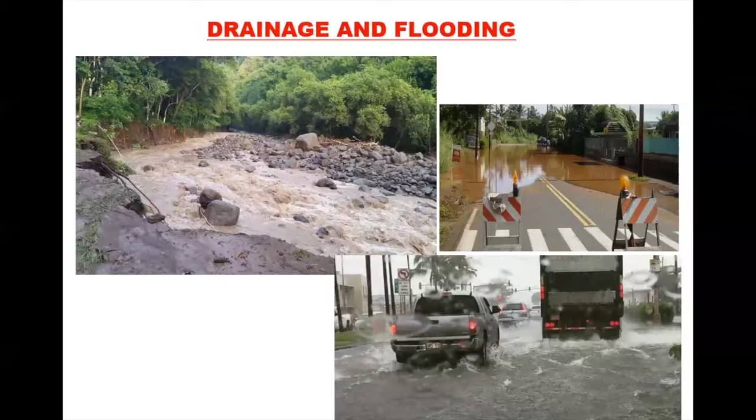And because of the way things are situated, a lot of that urbanized area where you work, where you play, where you live, is usually in the lower areas where all the water is going to come down to. So you're going to see a lot of this happening. And as urbanization keeps increasing, you're going to see more and more of these kinds of drainage and flooding situations around the island. Other things that you guys are probably aware of is like sea level rise effects.

What you're trying to see is, of course, during this summer, we saw the king tides that were happening.

So now water is actually coming up further into areas where we normally never used to see water. And you're also going to see things like erosion occurring right along the beach and coastal areas. So that's another issue we have to address.

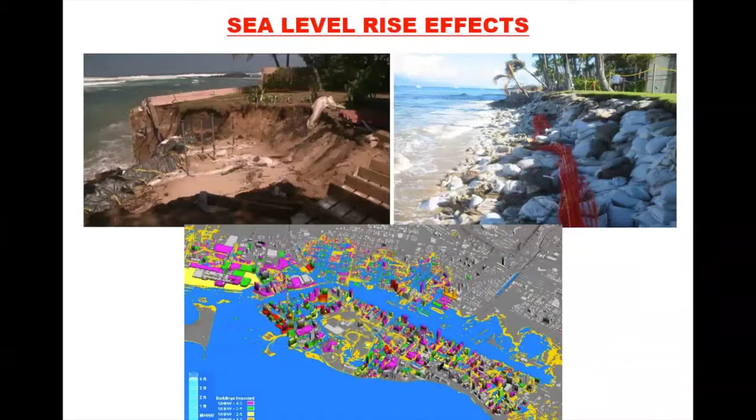Of course, other things is because we're on an island, we're surrounded by water. So we rely on this precious resource either for recreation, or in this kind of situation, in order to sustain us as far as drinking water.

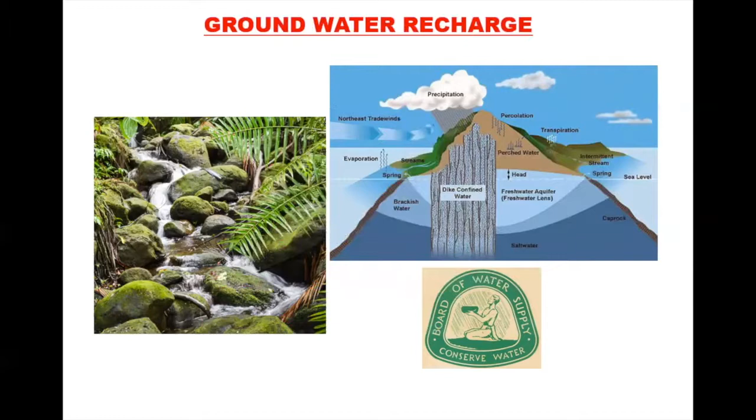So what does all this have to do with what we do? Well, where we come in is obviously from the city and county of Honolulu. A lot of it has to deal with all those issues. And then the other thing that ties into this is water pollution.

So this is something you could say maybe typical, but maybe not as typical, depending on what's happening in that neighborhood. When it rains, you're going to see all this pollution occurring, where the water starts turning murky, very turbid, and it washes off things like pathogens, oils and greases, metals, nitrogen, and phosphorus, which affects both the aquatic habitat, the plants that live in it, as well as the people who use it for recreational purposes. Okay, so what does that have to do with the city?

Well, the city itself, the way we explain it, is that we're responsible for anything that's owned and operated by the city. So that includes a lot of the assets, what we might call a drainage system—the roads, the storm drains, the streams, ditches, catch basins, anything that would capture and collect the water and get it out into the ocean.

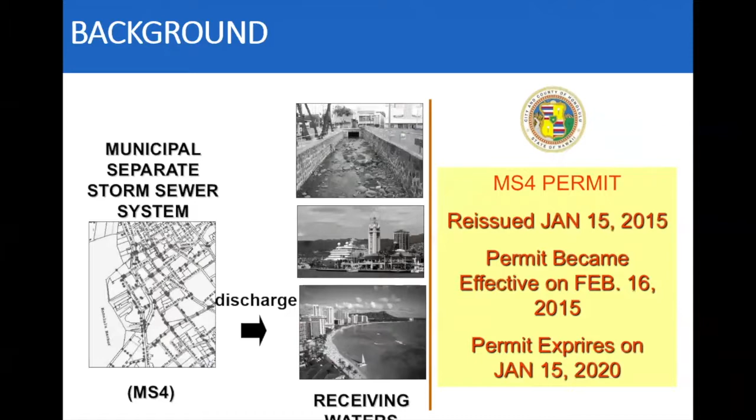But what it does say is that the city needs to implement a program to try to minimize, mitigate, and remove whatever pollution to the best of its ability, to somehow meet the state's criteria in terms of what they feel is considered clean, or pristine.

So that's what it kind of looks like—we get this permit and it breaks down into these seven various elements. Starting from the top, on the left-hand top corner here, and on this side, we'll work it around in a counterclockwise way.

It starts with public participation and outreach. We're working with the public, volunteers, various agencies, as well as the public themselves and businesses, trying to educate them on what's going on.

Then we move into construction site runoff control. That's really when things start to go into development, urbanizing your neighborhoods—building a house, a shopping center, a high-rise, whatever it might be. During that phase of construction, the city needs to establish a program for how they're going to mitigate and minimize the runoff coming from these construction sites.

Then it moves into the next phase, when there's an actual discharge. Say a contractor is trenching in for utilities, or putting in the foundation for houses—by doing that, they're disturbing the earth, moving up the soil, exposing it to the elements. So when it rains, it's going to wash all that out. Contractors themselves have to follow certain requirements to try to prevent that from happening.

But if it does happen, that's where our illicit discharge detection and elimination system is intended to go out and give the city the authority to enforce on a contractor or business, telling them they cannot do this. Because of what you've done, you're going to have to do corrective actions, clean it up, and at the same time may have to pay a fine.

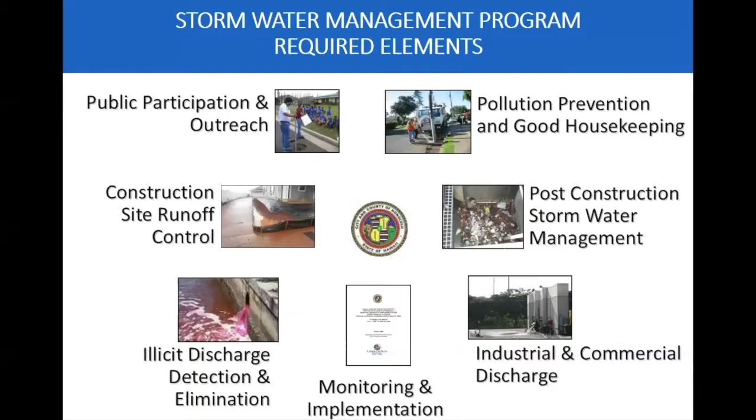So when we talk about treating the water, this is just a real quick overview. When it rains, the rainwater flows onto surfaces, whether paved, concrete, or a roof building. It hits that, and because it's impervious, it just washes it off. So what we like to do is filter that water, either allowing it to infiltrate or capturing it to reuse.

You could use it for other purposes, whether for landscaping, flushing toilets, or decorative ponds—anything you could think of for what that water could be used for. That's really the goal of our program: looking at ways to treat and reuse that water, and filter it so we can prevent it from being discharged into the ocean.

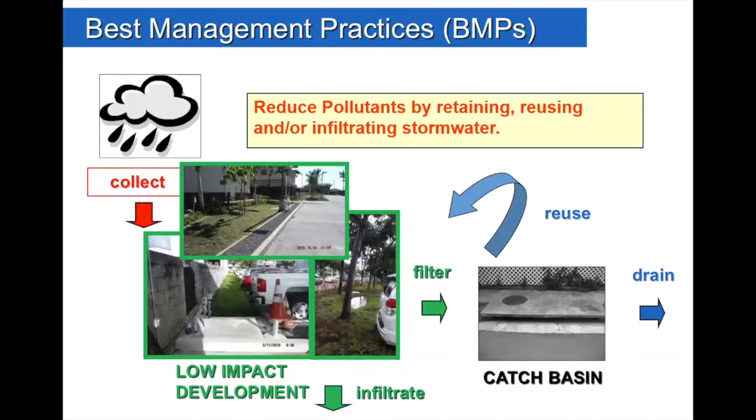So how do you do some of that? Some examples are infiltration basins, bioretention, green roofs, permeable pavement, cisterns, and vegetative swales. That's not the only things you can do, but there's a whole suite of options, and a lot of technology and studies being done on their effectiveness. From a city standpoint, we're still continuously learning about how these different systems can benefit the public, businesses, and the design community who come up with these plans.

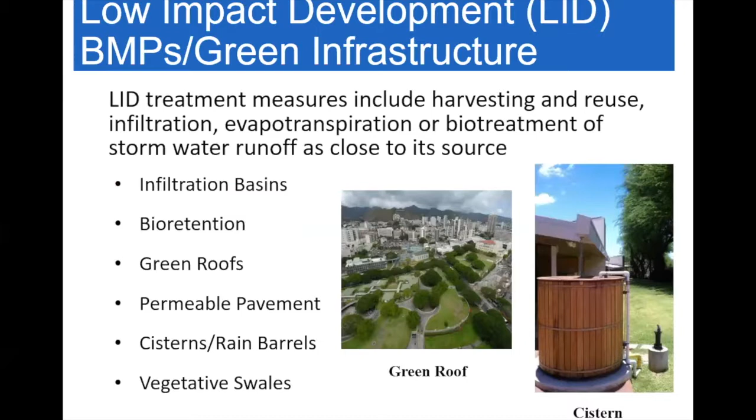Really what we'd like to do is provide resources, information, and research on how that could be applied to project sites or development plans. Then it becomes part of the overall project rather than something added in at the end just to get a permit. That's the change in mindset we're trying to get out to the public.

These are what we'd refer to as typical pollution sources—sediment, trash, debris, things you'd probably see visually. But there's a whole suite of different pollutants associated with that runoff, like bacteria or pathogens, nitrogen or phosphorus, or metals like copper, lead, and zinc.

That's what you see in a lot of urbanized areas—you might have a lot of vehicles, pet waste, wastewater systems, or anything contributing. But a lot of that you wouldn't actually see in the water; it's not a real visual thing. It's in the water itself, but you'd only know or detect it if you tested and measured it to see the results.

What you'd commonly find is that because of these things, you'll see some end results—fish kills, possibly algae blooms, or other effects like odor coming from the water, or you might get ill from contact with that water. These are downstream consequences you wouldn't obviously see in the water directly.

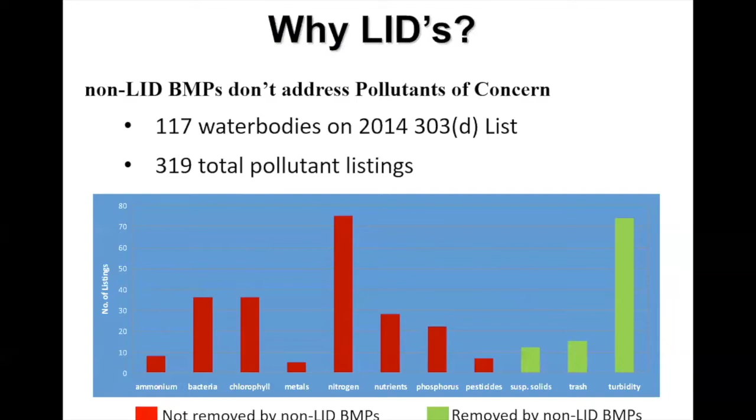As a city, we're not the ones actually coming up with this design - a lot of it is development. Developers come in proposing subdivisions, or plans to build a new commercial development center or whatever it might be. They come in with their plans proposing to follow whatever design standards the city has.

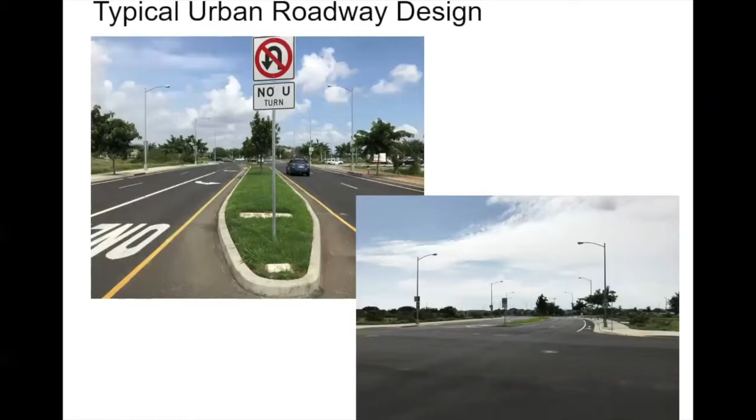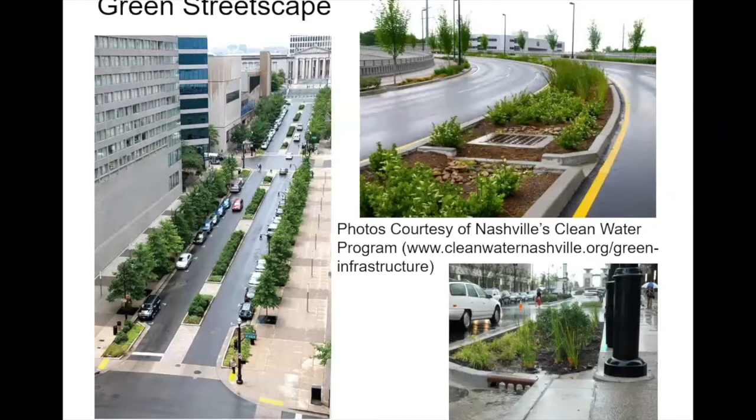This is something we like to establish, but we'd need ongoing discussions with the development community as well as the engineering community about how to make that change. That's pretty tough given everything that currently exists as the standard, and it would take a substantial effort to make that change. But that's something we're looking toward as a city agency - to provide that kind of resource to help the design community implement some of this.

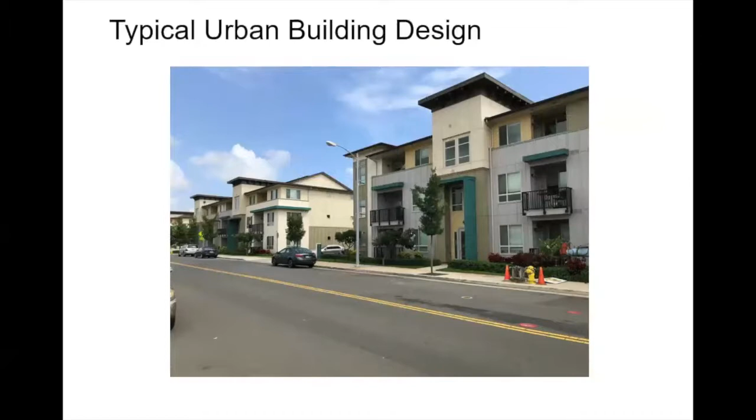So in most cases, they're not really capturing and treating that water, but rather just trying to capture it as quickly as possible and push it off the site. So what we like to do, from a more urban design perspective, is try to incorporate more of that green ideas or concepts into the building itself.

It's not just about adding landscaping primarily for an aesthetic purpose, but rather using it as a resource and capturing the water so that you could actually benefit something like helping with that urban heat effect, or maybe for water quality purposes, where you're trying to filter the water.

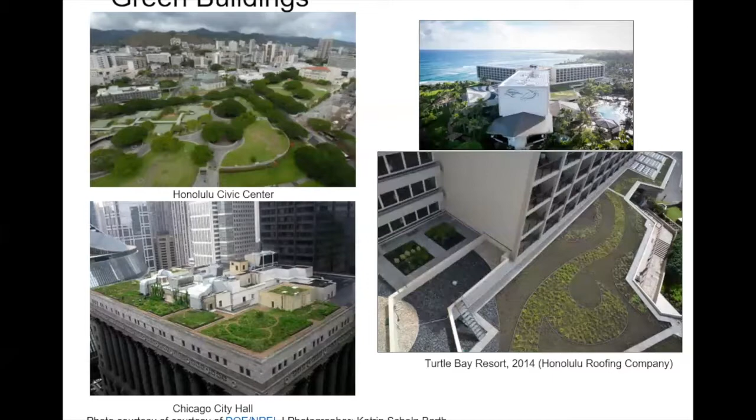Okay, so what is it going to take? I guess you can say it's probably a paradigm shift, both from the development community as well as from the engineering side. It's really thinking that there's going to be changes going on.

This is something that, I think more commonly, and maybe I was kind of guilty of this too when I was working in the private sector, is putting your head down and not wanting to worry about it. Just saying it will happen sometime in the future, I don't want to worry about this because it's just going to affect my schedules, my budget, whatever designs I'm going to have to do.

So obviously, what we like to do is have that ongoing discussion of how we're going to make that paradigm shift, to think about, rather than trying to get the water off the site as quickly as possible, capturing it and using it for other purposes. You're treating it more as a resource, looking at it as a benefit rather than as a hindrance to your design.

So what are some of those keys to success? Of course, like I mentioned, there has to be ongoing collaboration and teamwork, a discussion between the government, the planning community, the design community, you folks as researchers, and the up and coming minds of how we could implement some of these things. That's where we want to see what we can do to help long-term sustainability, from a water quality standpoint, a cost standpoint, an O&M process, things like that. That's something that has to be implemented at some point, but it's going to require everybody coming to the table and being open to these changes.

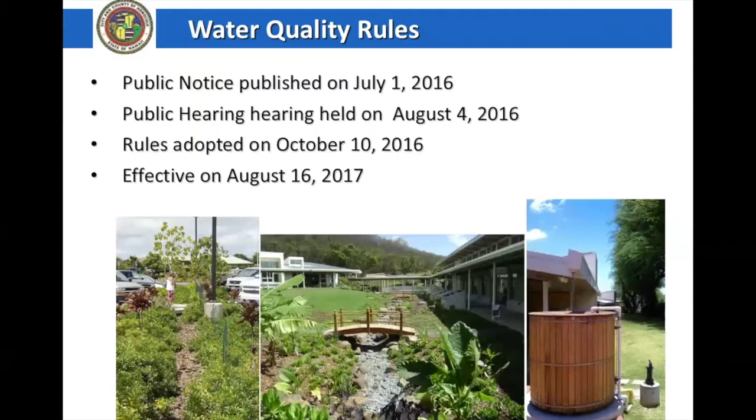What the city did recently was adopt and make effective, in August of this year, new rules. Those rules essentially cover both the construction part - where contractors are actually building things - as well as post-construction, after development has occurred, to address what they're going to do as far as treating and filtering that water. So the city adopted these new rules relating to water quality.

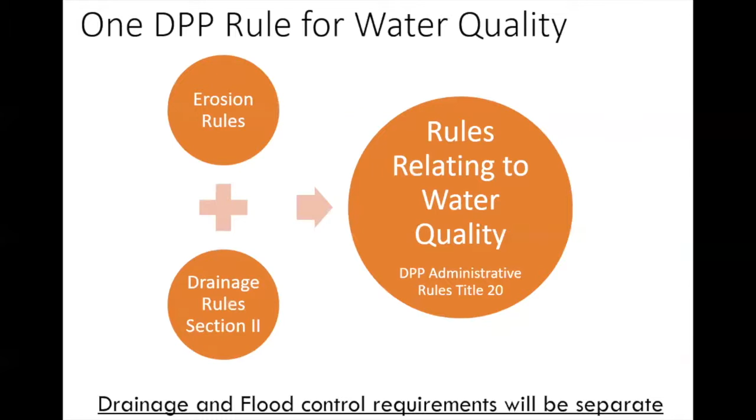In those rules, it basically explains and outlines the steps that a developer, contractor, or designer would need to follow for whatever projects they're building. This is really a synopsis, but the idea of how we implement it and provide guidance to the development community is that for all projects - whether coming in for a building or grading permit - it requires some consideration if you have any land disturbing activity. If you're going to disturb the ground, you're likely going to have to come in for some kind of permit, whether grading or building. At that time, you'll follow this process to identify what we need to design for each project.

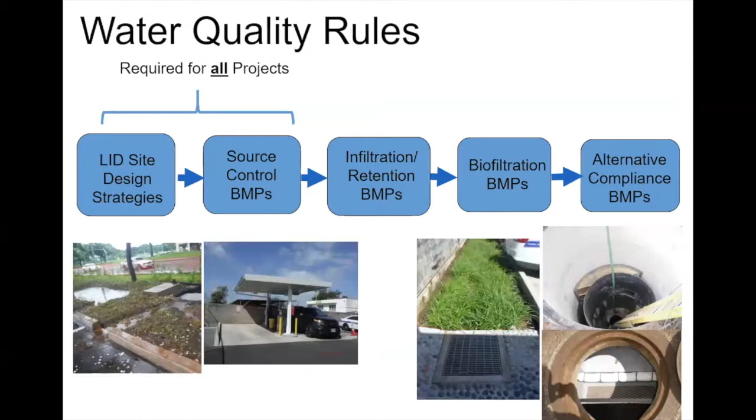As they go through the development of that project and get further into the design, they'll start looking at more treatment mechanisms - things like infiltration, reuse, biofiltration, using plants to uptake a lot of the nutrients and metals. And then lastly, you might use something like alternative compliance, which involves more of these manufactured units - not the most effective, but it does provide some treatment.

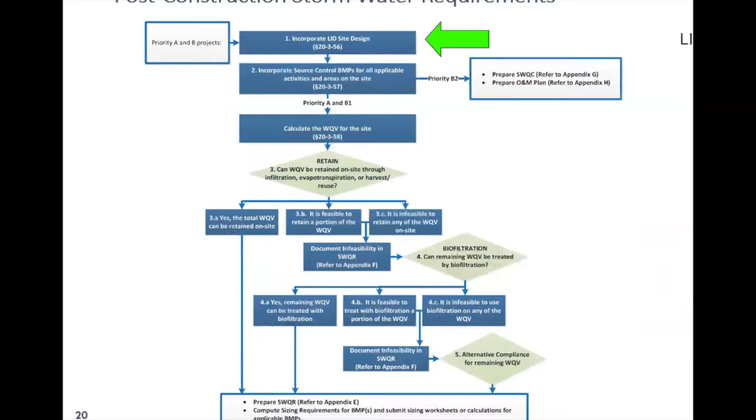This is really just a flow chart that summarizes the process a designer or developer would need to follow. They come in with their project, identify if we need to incorporate - which is pretty much for all projects - some kind of LID site design strategy. Once they identify that, the next step would be to identify what those source controls are.

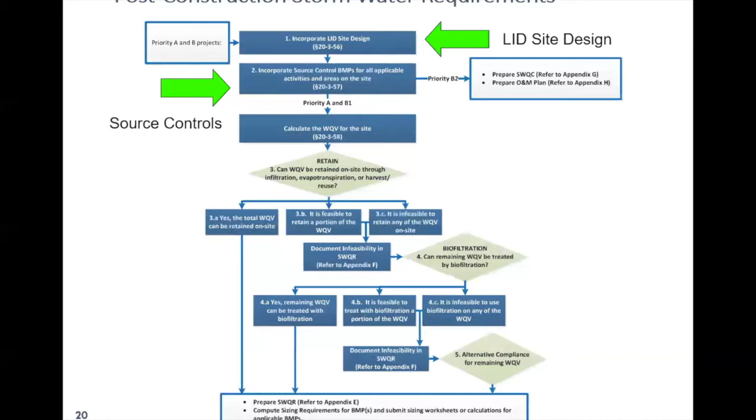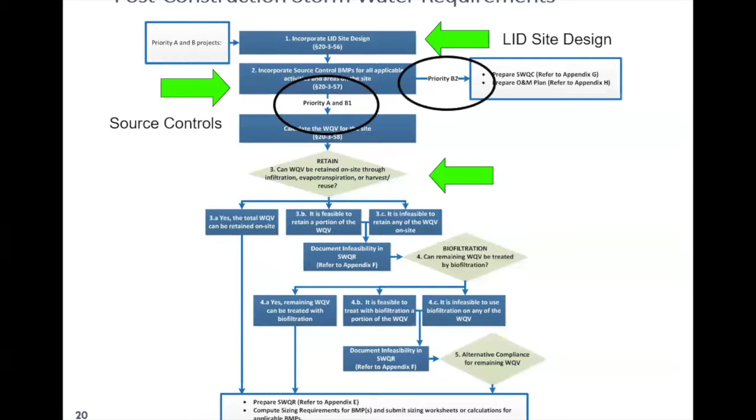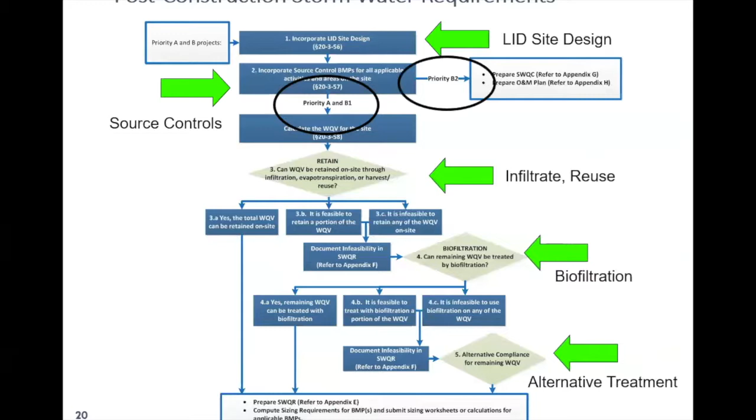And if it does fall within certain categories, they would start looking at other treatment mechanisms, whether to retain or reuse the water or to biofiltrate. If they're not able to do this, they try to figure out how to incorporate that into the project. And if they cannot do that, they go to the next step. It's really a process they have to follow to get to the point where they're treating the water as effectively as possible to capture it.

So what are some of the site planning processes a designer would need to follow? First, they would need to identify what the potential sources are. What is the project really intended for?

Are they going to be building a commercial building where there's going to be loading docks? Is there going to be fueling going on? Are they going to be washing equipment? Will there be parking lots as well as any kind of equipment storage? These are all the potential sources of where that pollution might be coming from.

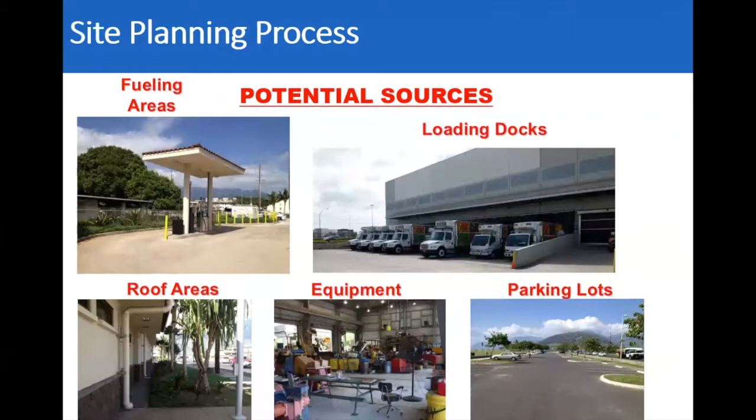So any designer is going to start thinking about what it is they're designing, figuring out the actual source. Then that tells them how they're going to capture that water and treat it before it leaves the site. Once you've identified the source, what are the pollutants of concern?

Are we targeting oil and grease? Are we targeting metals, nitrogen, phosphorus? These are all things associated with various different activities. Of course, the heavier industrial activities bring more significant or severe pollutants you could encounter, so you have to think about exactly what you're designing these treatment mechanisms for.

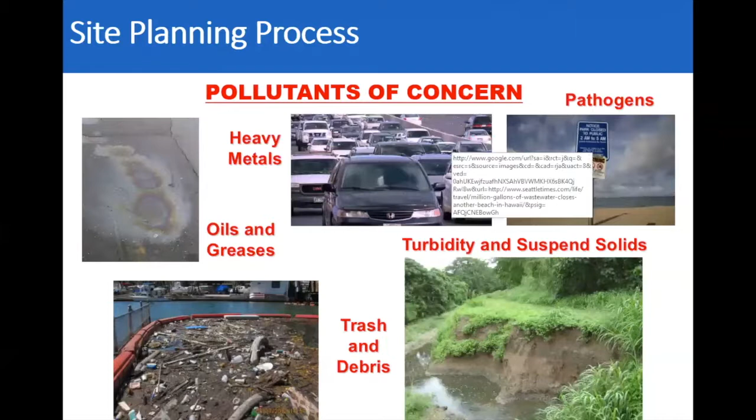Of course you wouldn't want to, if you know you're a heavy industrial facility dealing with toxic chemicals or other hazardous things, try to come up with a plan to treat the water by putting it down into the ground and into the groundwater, because that would affect groundwater recharge. You have to look at ways to capture and treat it so you're not affecting someone working or living in that area. So you have to think about what you're targeting and come up with the best way to address those pollutant sources.

So some of those ways involve identifying your existing area, and what we try to encourage is emphasizing the infiltration of water—preserving a lot of the natural areas, whether soils or vegetation. The more they disturb it, the more chances you're going to encounter different pollutants. But if you can conserve a lot of that area and direct the water into it, that's where you can get a lot of infiltration to occur.

But in most cases, as we see in urban Honolulu, it's wall to wall—you're going to have a building going almost all the way up to the sidewalk, then another sidewalk on the other side with another building right up to it, and in between a large parking structure. So that minimizes the chances for preserving any existing vegetation.

So that's really at the early stages of planning where they have to start thinking: where can they create these pockets? Maybe they can preserve some existing vegetation, try to minimize impervious surfaces, and use it as a common area—maybe a park, a walking pathway, or even a decorative feature of the property, directing water into a certain area so it becomes like a decorative pond.

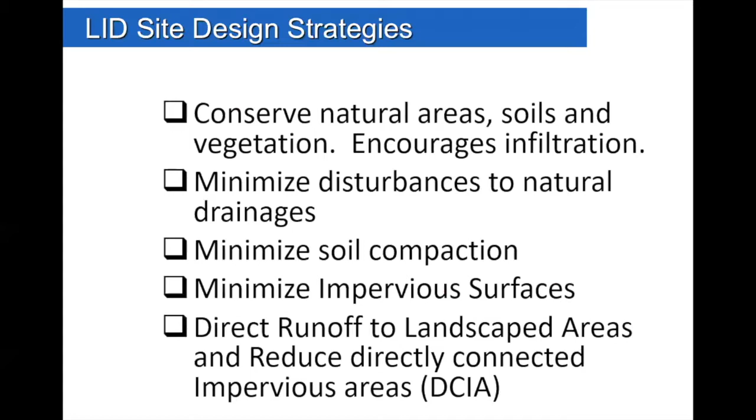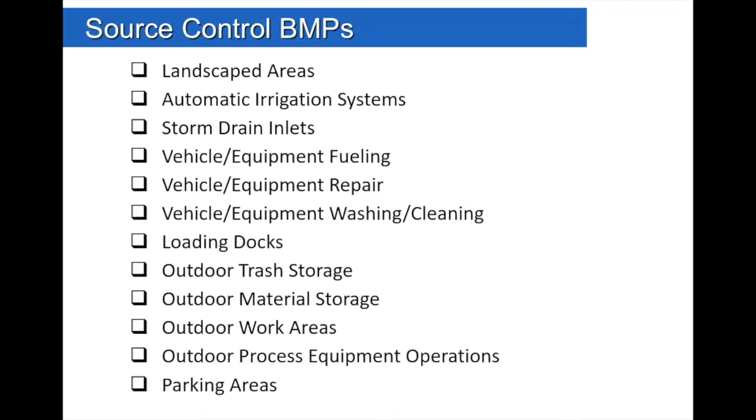Just thinking about different ways they could use that, trying to come up with creative ideas for managing water on your site. And of course, looking at source controls, just identifying where the water could come into contact, since that could be a source for pollution.

The way the rules have outlined this is really based on both volume and flow that you're going to encounter. As far as the city is concerned, we're targeting what's referred to as a 1-inch storm event, which ties into the concept of the first flush.

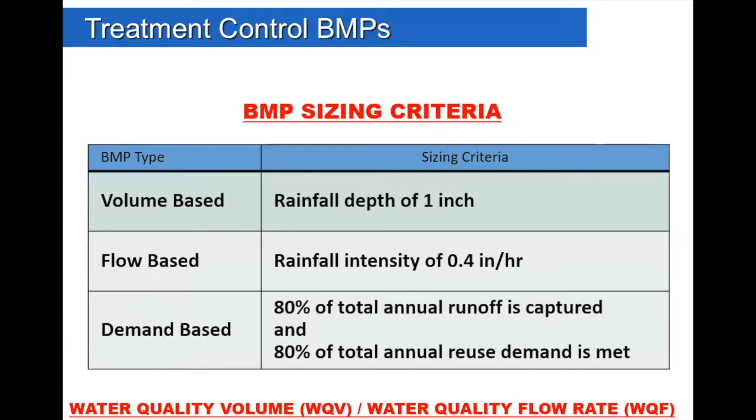It's still kind of debated how effective it is, but the idea is that with that first initial rainfall, especially after a long dry period, you see a huge spike in sediment, nitrogen, metals, or whatever it is, because it's washing everything off the surface. As the rain keeps flowing, you get a dilution effect and the concentration tapers off. So targeting that first inch of rainfall lets you capture at least that initial flush of water.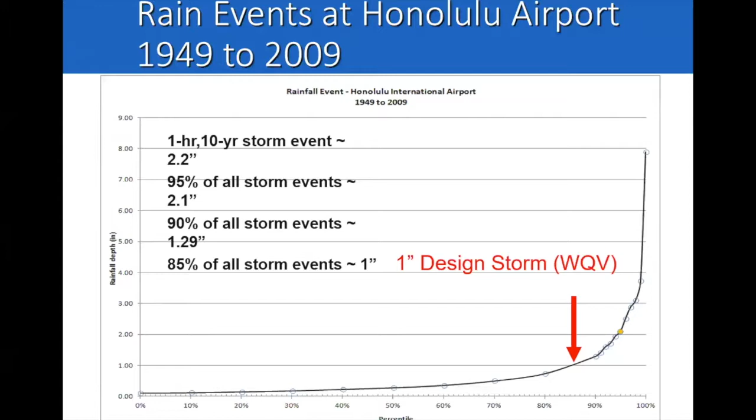When you map out average annual storm events over 50 or 60 years and chart what percentage that 1 inch of rainfall represents, you'd see it captures about 85% of rainfall events over that historical period. As you design for bigger storm events, your treatment mechanism gets bigger too, which results in higher costs. So the idea is to find that medium—capturing the majority of storm events in that 85 percentile range while still treating the water without a huge effect on development costs.

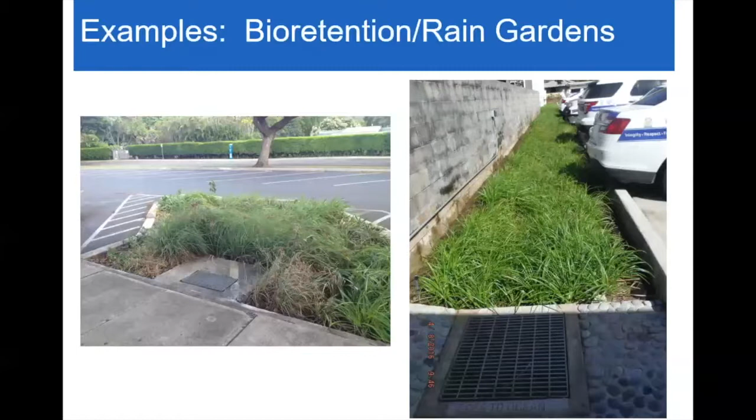And then of course they have these inlets, which are really to capture that high flow event. So when you get a big rain event, it's not going to start flooding the surrounding properties, but rather it will allow the water to still drain while still having the ability to capture and filter the water.

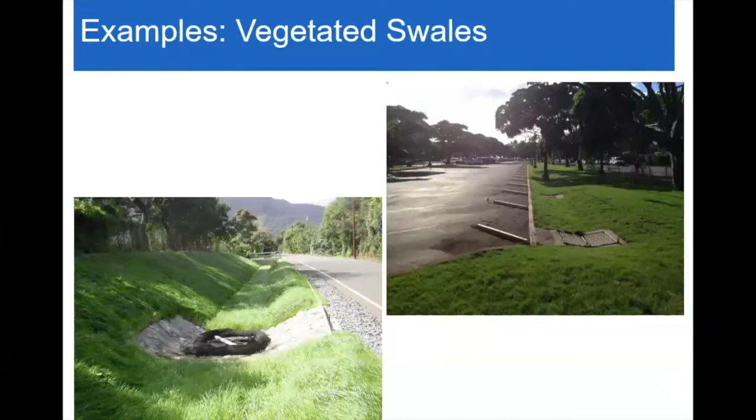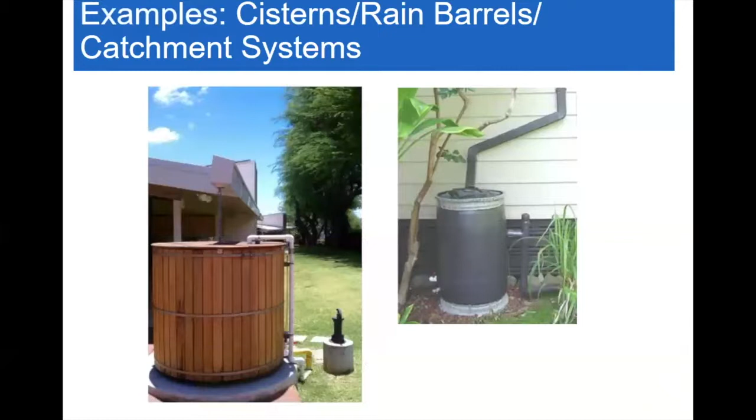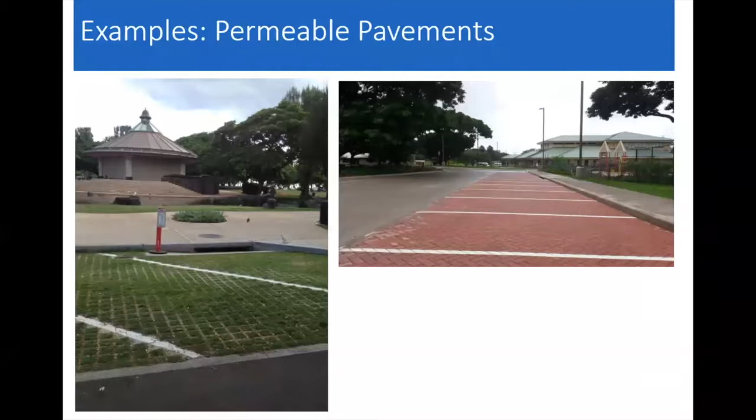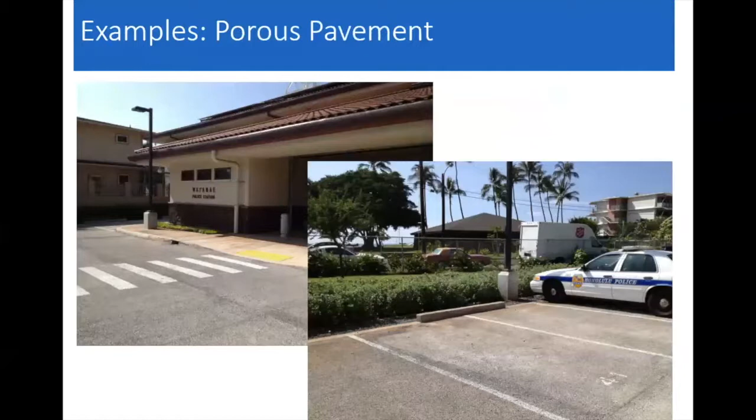What they do is lay it down, but it's not something they compact at a really high rate like how they would with asphalt or concrete. Instead, there are a lot of pores built into the actual asphalt itself, and water can filter directly down through it, providing some ability to absorb that water into the subsurface. This is where the technology, as they develop new systems and ways to capture, reuse, or filter water, is heading.

So, some resources to provide. The city's Department of Planning and Permitting is the agency here in the City and County of Honolulu that issues all those building and grading permits, like I mentioned, and they have all their resources on their website, honoluludpp.org. If you go to the applications and forms section, there's a drop-down menu where it says stormwater quality. Once you go in there, you can get all this information, going back to the development and design community. They provide all these forms, the rules, and all the technical background on what's needed for whatever processes they want to do for their particular site.

The same thing occurs on our Department of Facility Maintenance website, with the Stormwater Quality branch. We link up to the Department of Planning and Permitting's website, all referred to as the rules relating to water quality. If you click on this tab, it directs you to this page where you can get all the same information that DPP would have. In addition, we also have other things like flyers. We do a lot of outreach, helping out the Department of Planning and Permitting by providing flyers, brochures, technical manuals, and resources that anybody could use to get a better understanding of what should be done.